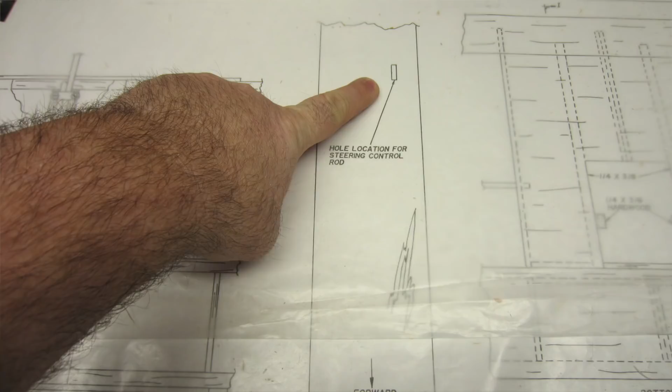One of the things that you might find useful for this step is if you picked up the 4-in-1 Zona saw from Balsa USA - it actually has 4 different blades to use. This smaller blade is going to be perfect for connecting these lines.

And then you just continue on like that for the rest of it.

So I wanted to talk about a mistake I made in the last couple steps. I misread the manual - this is the first time I'm ever building this one - and I cut this control rod slot out way too big. I realized after I cut it that I'd made the mistake.

So I just wanted to show you how easy this was to fix. All I did was cut a scrap piece of 1/8 inch plywood and fit it to this slot. I took the measurements and got it cut, and put it in there. I used thin CA to tack it in, then put thick CA over the top and worked it down inside the little bit of crack that was right on this end, and then sanded it flush. So that will be like it was never there.

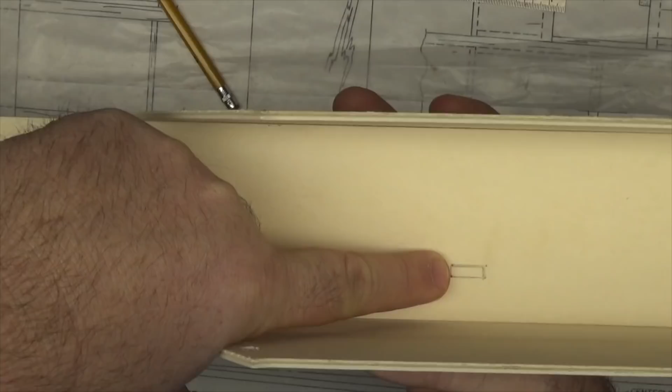I just wanted to show you that mistakes can be easily fixed. The control rod slot was supposed to go here - I misread the instructions and put this long slot in here, but it was easy to fix. This is all good to go, solid as a rock and sanded flush.

So when I get the fuselage painted, you won't even be able to tell this is here. This is perfectly flush, and when I paint the fuselage, you'll never even see it.

Okay, so the next step says to position the fuselage over the top view. The problem with mine is going to be that I am building the tricycle gear version, so the gear block in the front is going to be in the way of me doing that.

Okay, so what it says to do is clamp your fuselage to the workbench using C-clamps. The way I've got my bench set up, that's going to be very difficult to do. So what I'm going to do is turn my fuselage sideways enough so that I can get my gear block off the front, and then use T-pins to clamp this down.

What I do suggest doing is taking your spare sheet of 1/8 inch plywood and sticking it underneath the rails in the back. That way you're going to be making sure that you're flat all the way down. And then all I'm going to do is the same thing that we did earlier, I'm just going to pin the fuselage down using pins. I'll use the T-pins and push the pin right down onto the wood there with the pin forward. This will hold my workpiece down so that it doesn't move around while I'm trying to glue on the fuselage sides.

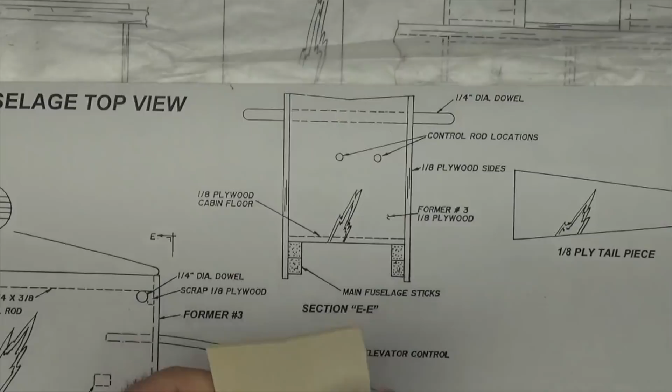Okay, so the next step is to locate the F3 former, the former of 1/8 inch plywood that's got the little dihedral cut in the top of it. It says I'm supposed to transfer these two holes onto this. I'm going to share a real quick tip. This is actually the set of plans that I've already cut off the top of my plans when I started, so this line here is the plywood floor.

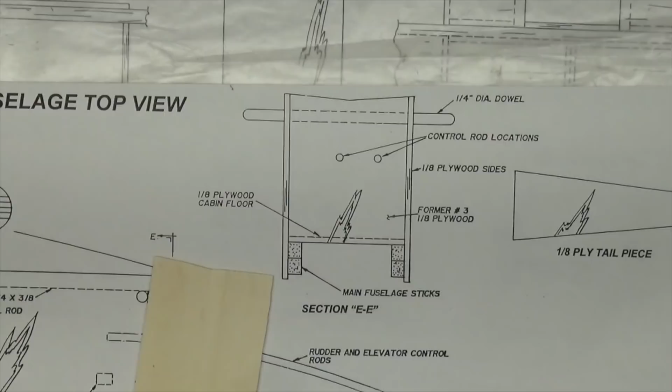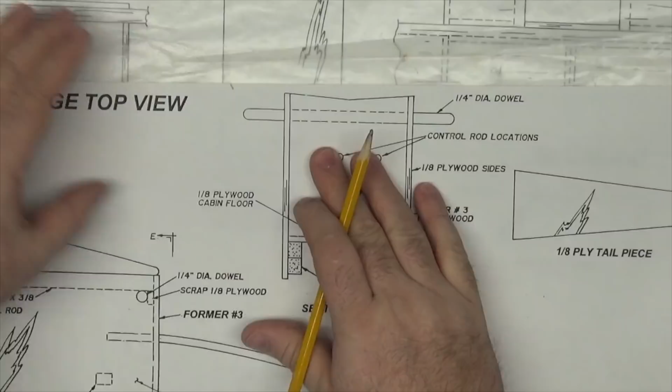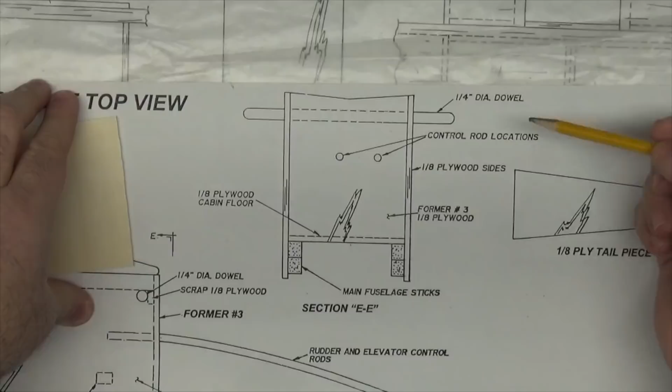This line is the bottom of the F3 former. So what you can do is lay it on there, make sure it's the right one, then simply cut this section out and put the piece of paper on top of the former and mark my holes with the paper. That's going to be a lot simpler than trying to measure and find the centers, so you can save yourself some time just by putting this on here and marking your holes through the paper. It'll be a lot simpler, and you're not going to lose any critical information. You can see here all that shows is the 1/4 inch dowel, and everything else is according to this.

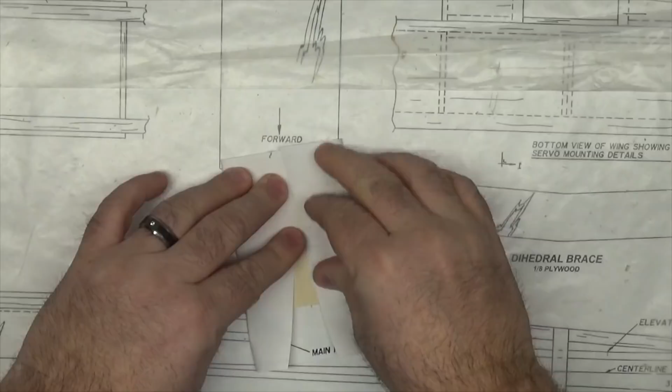Okay, so all you have to do is cut this section out here, then lay that right on your former and mark your holes like that. It'll be a whole lot easier that way. So I've got my plans cut to fit my F3 former here. All you have to do is lay the former down on top, fold the paper over so that it stays in place. When I flip it over, just be careful flipping it over.

You can see the spot on the paper where the holes have to go. Then all I do is simply mark my holes and drill them. So now you can see here I've got my holes marked, and all I'm going to do is simply drill right straight through the paper. My F3 former is still inside the paper. I'm using a couple of 1-2-3 blocks just to hold everything in place, and I can go ahead and drill my holes knowing that they're in the exact right position.

Just like that, good to go. And if you want to double check it, you can turn this over, line up your F3 former, and check the position of your holes.

So now all that's left to do is glue in the F3 former. You're going to want to make sure that the bottom edge of the F3 former is flush against the fuselage rails. You don't want this up on the plywood floor bottom, you want it down on the fuselage rails. You may have to do a little sanding to get a good fit here, but it shouldn't take very much. Line everything up, make sure it all looks like it's supposed to, and good to go. Then glue that in.

One thing I would do is use thick without kicker. Once I get this placed, I will place a 1-2-3 block inside to make sure I get a square fit. I would use thick on this so you have some work time.

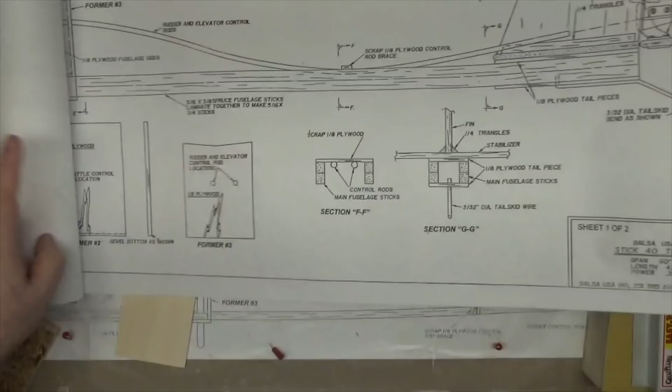So the next step is going to be to drill the holes for the throttle control. Again, what I will do is grab my other set of plans that I already cut off. Right here, you can see the throttle control rod location, just like that.

Since I'm just drilling the one hole this time, I'm just going to measure this one instead of cutting the plans up again. So I'll just measure the distance. This is showing me the center of the hole is about 5/32 away from the edge, and 3/4 of an inch up from the bottom. So I'll just make those measurements and mark my hole.

Now that I have my hole marked for my throttle linkage, I'm just going to go ahead and drill my hole. And we're good to go.

Now all that's left is to glue the F1 former in place. You want to make sure you're between the fuselage sides and flush all the way around. Once you make sure your fit's going to work, go ahead and glue it in place.

Okay, so the next step is going to be to take the 1/4 diameter wing dowels. These should be 5 inches long. If they're longer than that, you just need to cut them off and round the edges of the dowels round. If you can see this in the video, you can see how that is.